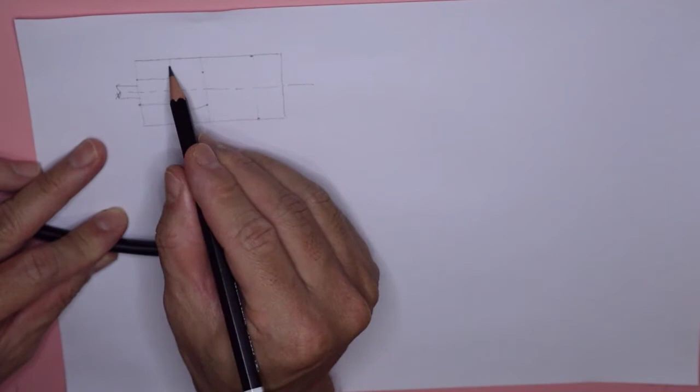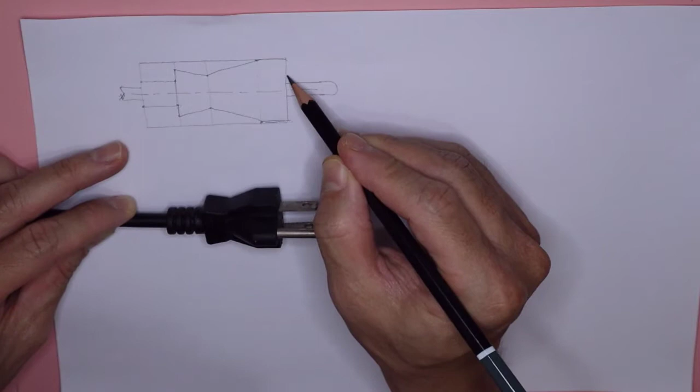So when I connect the dots like so, here, then here, then like so. Okay, so roughly we already got the shape from the top view, and then we just add this metal here, and probably I will create the metal, like so. I will extend the sketch, the center line.

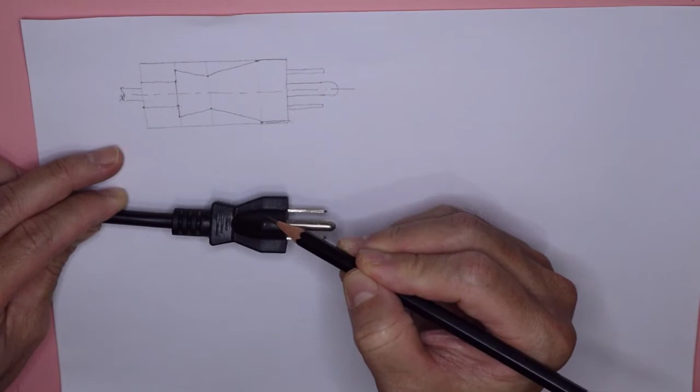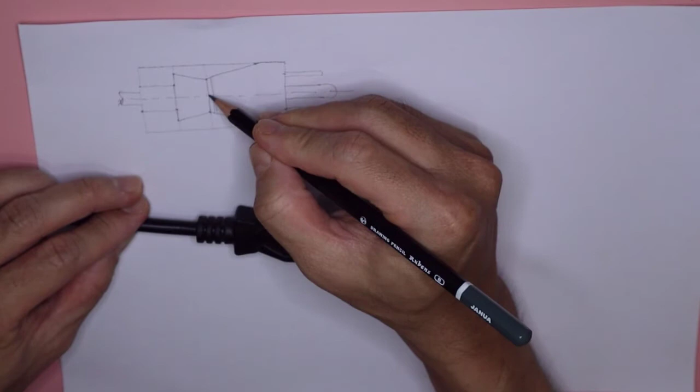Right now I'm going to continue to this type of the upper part. Probably I will use this one as a guidance, and because this one has two, I will give two kinds of lines here to represent it, and then here is the radius, and then go right over there, and go right over there.

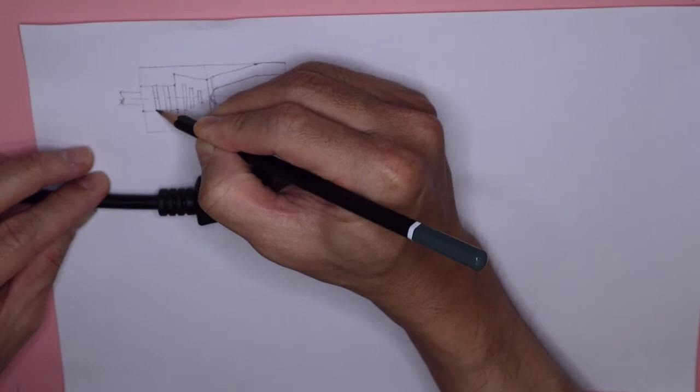So roughly I will add the embossing feature here, as well as the grooving in here. So there's a grooving. I think from the top view that's enough information, so I will continue to the side view.

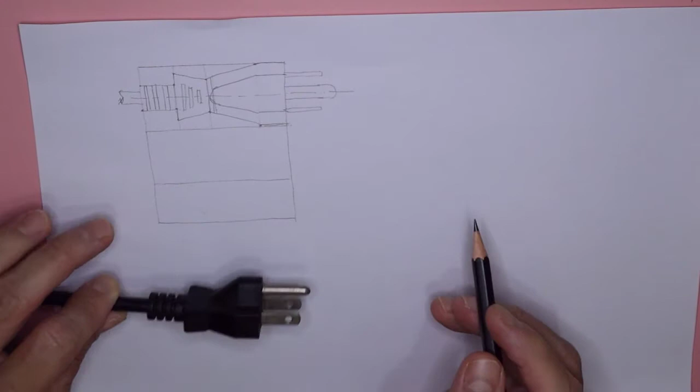So for the side view, I need to project the basic shape, like so, like this one here. So this is the basic shape. Probably I will keep the center point here. So this one basically is the diameter here, it should be almost the same.

Go through here, so I will connect the sketches here, the projected line, like so. So this is the center line, so go through here, and then they will have a slight taper, like so, and then go through straight. For the top of it, this one is basically just a line like this.

And then we continue with the grooving. Here there is a groove, 1, 2, 3. So there's a groove here, and this one as well. Then continue to the metal part here. This one is a metal part, and as well as here is the metal part, connected to the projected line from the top. Then I will create the circle to represent the circle.

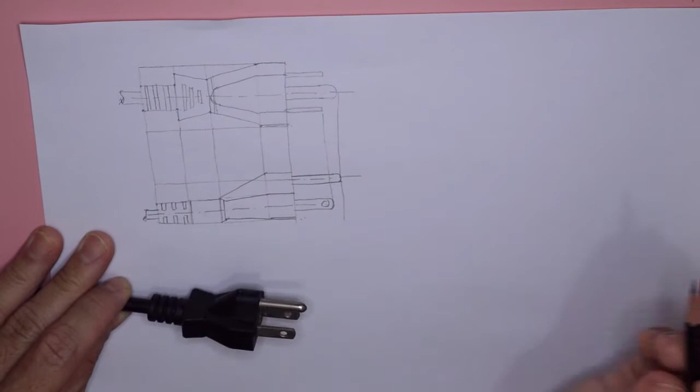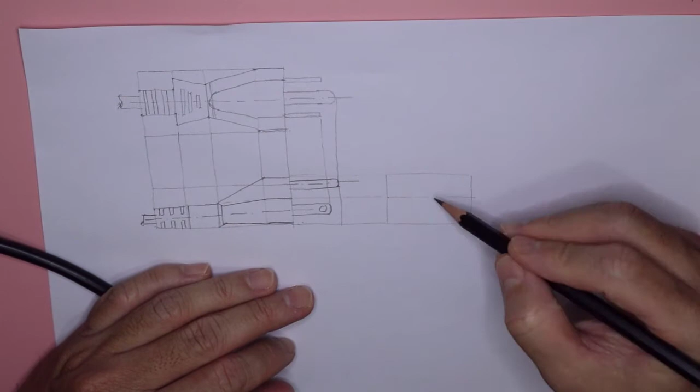I think just add the cable line, and I will continue to the front view. So the front view basically just extends from this box here, and I will also extend it here, the extension, and then this one I also extended the line. Then I will create the center line here, and basically the center line should be connected 45 degrees if you have the projecting line.

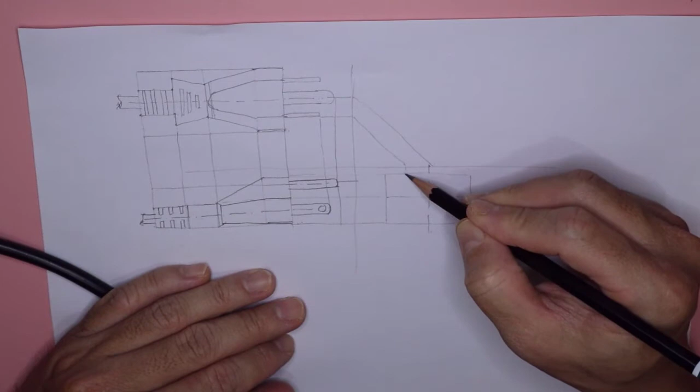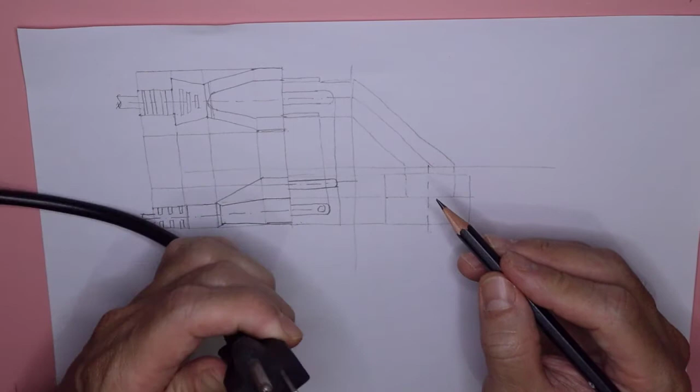So 45 degrees, and then I can project this roughly, if I use the compass here like so, it would probably be more accurate, but this one is just a sketch. So like so, wait, like so, and then probably this line here, yeah, okay, like so. So this one is projected here, and then we'll meet with the shape here, and then there is a line.

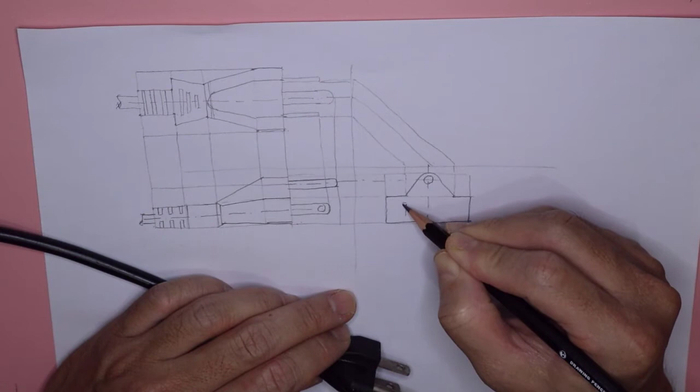And then as well as the center point, and we just create a circle here, and also for the rectangle, 1 and 2 for the rectangle. So I think the basic shape is done.

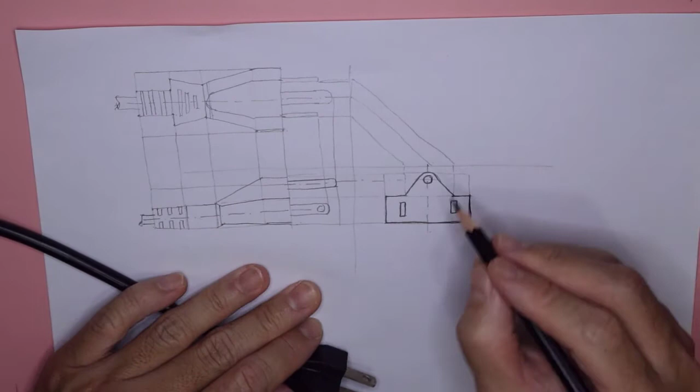I will make more bold, more thickness on this outer shape, so we can distinguish between the line weight, which is the baseline, and where is the center line.

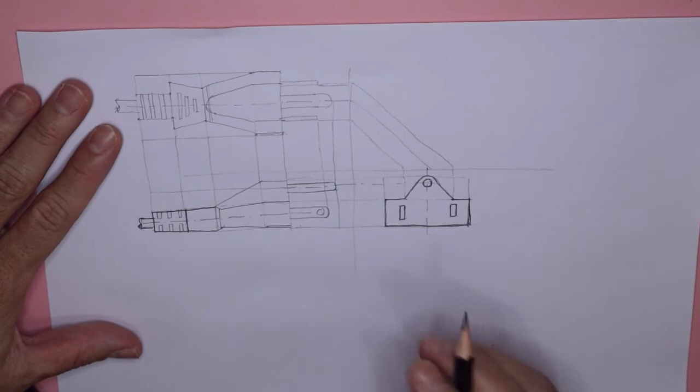So I will do it using the bold line. The tip is when you draw, using this some kind of piece of paper, you can conveniently rotate your paper like so, so it will give you more convenience and more precision when you draw something or doing the sketch. Don't be afraid to explore the convenient position of your paper.

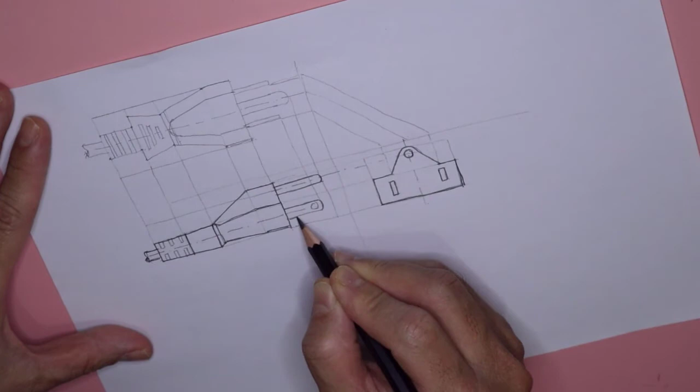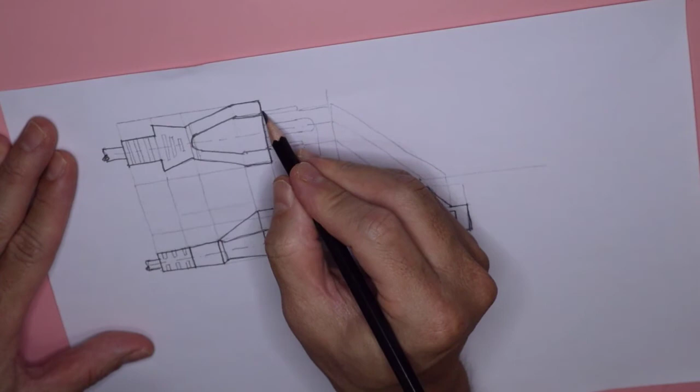Like so, this one probably should have a line, and this one also has the line over there. I will continue to create more bold lines to better distinguish between the construction line and the center line, so we can easily distinguish it. Like so, and then this one is the baseline, and this one is the metal part of this electric plug, so this one also has it.

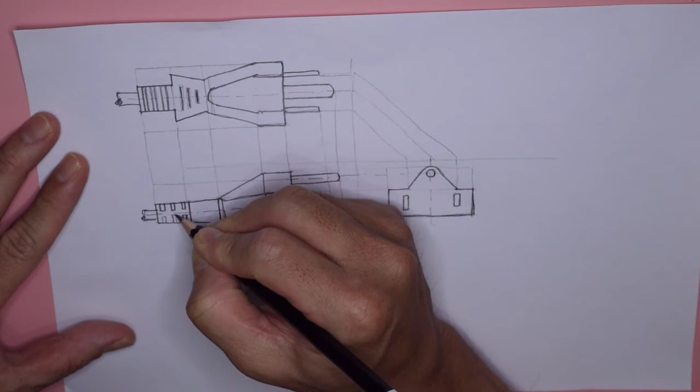And then this one is just the emboss, so probably I will just use a wider line. Okay, so when I'm going to create the dimension here, probably because this one is too small, I need to create a detail view for this particular position.

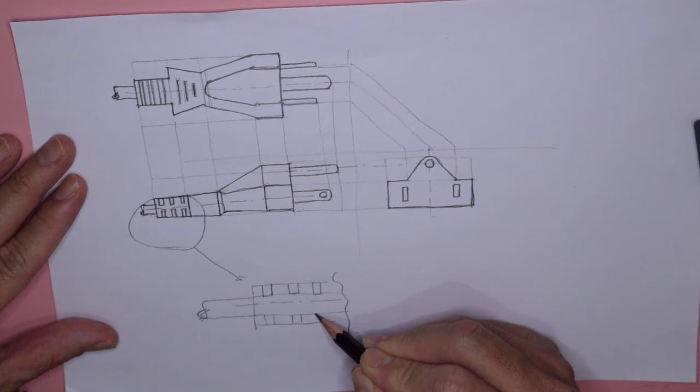Particular part, so I will create it at a bigger scale, like so, to represent the grooving. This one is the cable going through outside, and then there is a grooving here. Okay, yeah, I think the basic shape is already done. So more or less we will have a good shape.